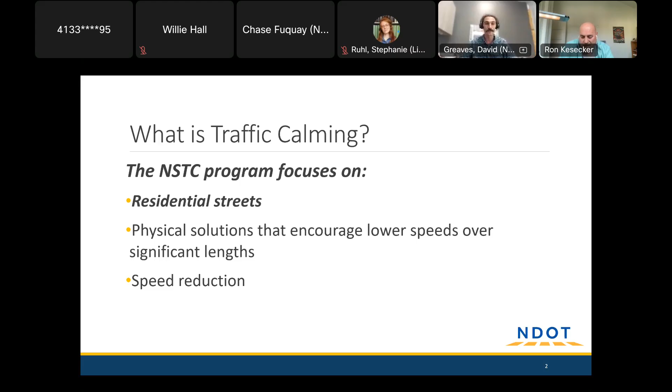One of the reasons speed and speed reduction is so important here is because it has a direct impact on safety. Vision Zero in Nashville is the idea that nobody should have to be killed or seriously injured on our public streets. So the traffic calming program fits into that by making our neighborhoods more safe, sort of in parallel to other programs in the department that focus on different street types.

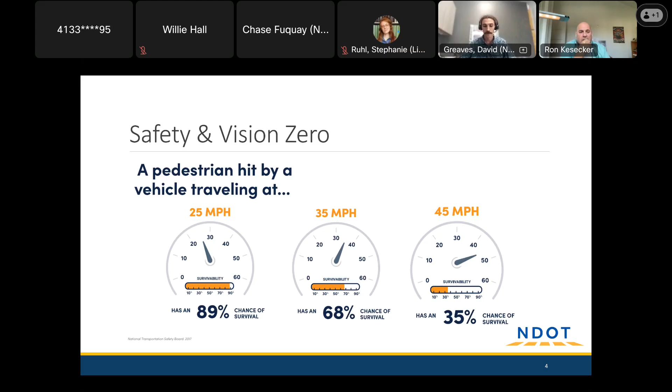This is a really popular program. In March of 2025, when Cumberland was selected for traffic calming, y'all were among a group of about 600 streets or so that have applied and not yet been selected. You can take a look at all of those on this traffic calming tracker map at TrafficCalming.Nashville.gov. You can see the status of the Cumberland Avenue project, as well as every other street that has applied in Nashville. You'll also notice some dark blue lines - those are projects that have been completed, and I know y'all have a handful of those pretty close by.

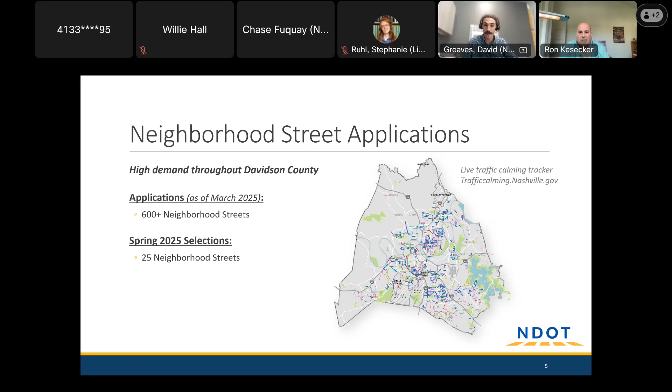Anything we're not able to handle with this project that y'all may still want to see, we encourage you to request through Hub. That can be signals, sidewalks, fixing a pothole, sort of anything on the spectrum of big to small. That can be accessed by calling 311 or going to hub.nashville.gov online, or by using the mobile app. I've found that's the easiest way for me to use Hub, but any of those three work just fine.

This is a map of the extents of the project. We're doing the whole street all the way from Gallatin Pike to the park. We reviewed a draft concept last time. We got a lot of really good feedback from you all about some other treatments you'd like to see, and I'll get into those when we take a look at the design. As you can see, we've got DuPont, Roosevelt, Duling Avenue, all existing traffic calming projects, so I imagine you're somewhat familiar with the tools we're proposing tonight.

Any questions about what I've covered so far before we jump into the proposed design? I appreciate that was a pretty quick run through the recap, but I think everyone here was in our first meeting, so I don't want to take up more time than we need to.

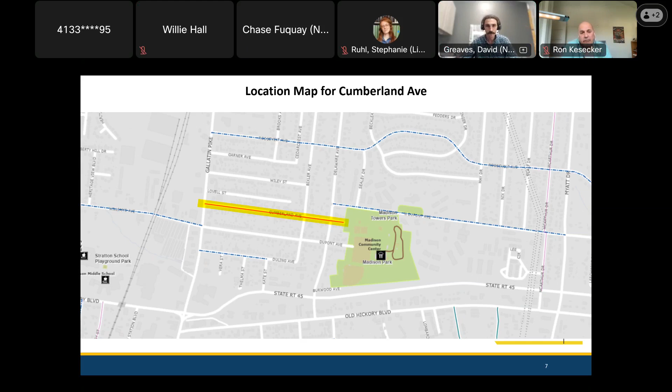So some of the tools we identified for Cumberland Avenue in our concept design, and then based on feedback we got in the first meeting, are speed cushions. To recap, they're similar to speed bumps, but stretched out to achieve a higher target speed. We're not asking folks to go 5-10 miles an hour over these, we're really shooting for the speed limit or just a little bit under.

These have a width of 6 feet and come with gaps in between them. That's intentional, and the idea is that larger emergency vehicles should be less impacted than smaller personal ones. So these are a middle ground between calming the vast majority of traffic without seriously inhibiting the ability for emergency response to do their job.

They're made out of modular rubber pieces, so while they look like one big lump in the road, it's actually a bunch of smaller pieces, individually bolted onto the asphalt. That helps us keep these very consistent over the entire county, and hopefully for a quicker installation time as well.

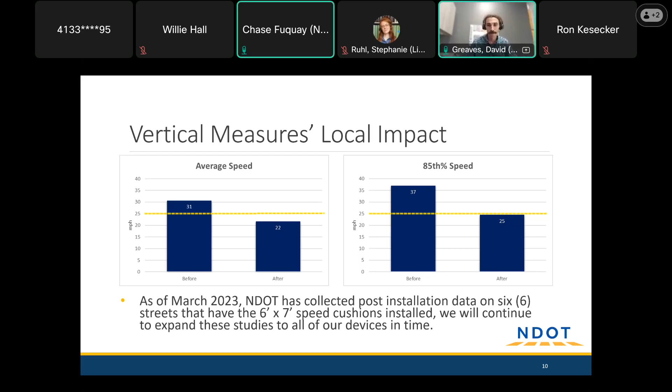The reason we rely on these so heavily is because we know they work in achieving the program's goals. That's demonstrated by a limited study we did back in 2023, where we took before and after measurements on 6 different projects around Nashville, and saw the average speed come down from 31 miles an hour to 22, and the 85th percentile speed came down from 37 to 25. For anyone who doesn't remember from the first meeting, the 85th percentile speed is the number where 15% of people measured were going faster than that, and 85% were going slower.

Something we did not propose in the last meeting, but we heard that y'all were interested in seeing on Cumberland, is edge line narrowing. That was something we left and told you we needed to look into, to see how narrow would be appropriate in this case. What we're going to propose is two 9-foot travel lanes, so they'll feel pretty tight, but that allows for a couple feet on the edge of the roadway. We're hoping that makes it more comfortable to walk on the pavement, since we know y'all don't have sidewalks, and we want people to be able to walk to the park or to Gallatin to catch a bus without being too nervous about conflicting with vehicles.

So we'll take a look at exactly where that is on the plans, but I'm happy to let y'all know that we were able to get this included in the design as well.

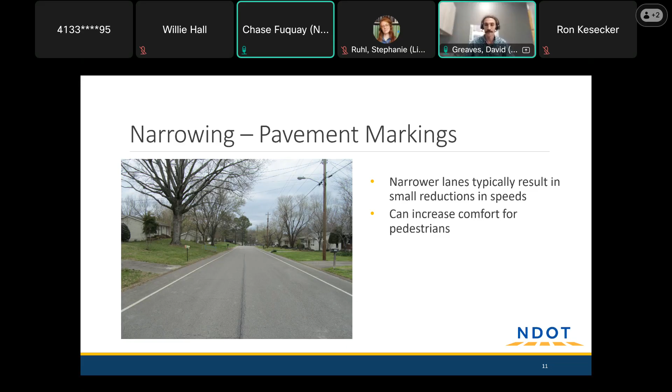And now we can take a look at the plans. Very similar to the concept design we presented, we've got 4 cushion locations identified. You'll probably notice there's a larger space near Bixler Avenue. That's partially due to Bixler being a 4-way stop, so we've got people stopping there anyway. But there's also a bit of a hill just to the west, and we're not able to do cushions on parts of the roadway that are too steep. So we did our best to get those as evenly spaced as possible, but it didn't work out perfectly.

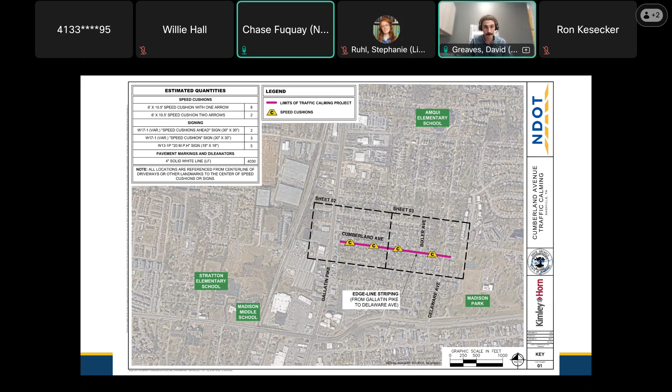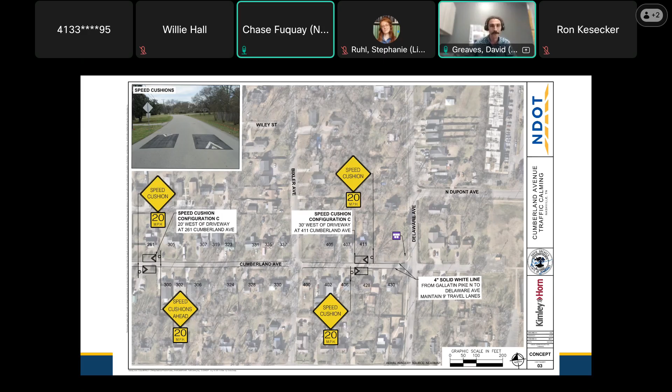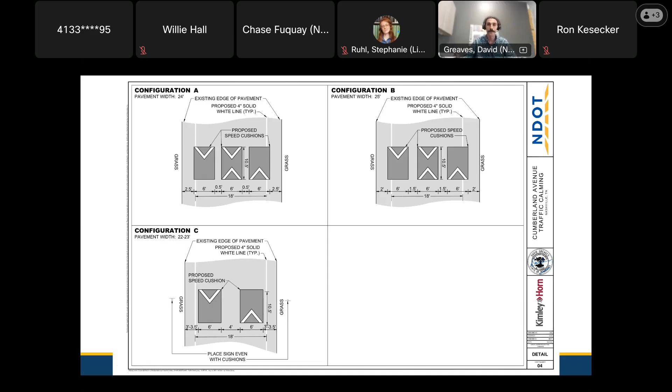And then the last page is just the diagrams that show how those different cushion configurations lay out. You can see we've squeezed a little bit to get 3 in when it's 24 and 25 feet wide, and then stretched them out as that roadway narrows. What we don't want is anyone driving off the road to go around these. So when we've done those 2 cushion configurations, we've made a note that the signs should be placed pretty much even with the cushions, and we found that does a good job of discouraging folks from attempting to drive off the road.

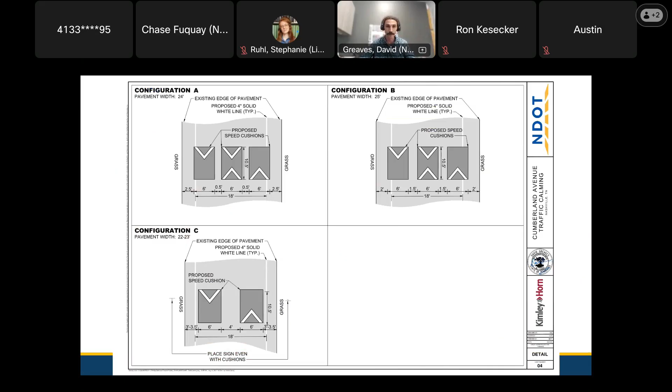Those are the plans. Next, we're going to talk about the rest of the project's process, but before we do that, I want to pause and see if there's anything about these that y'all have questions about, or additional feedback, other thoughts.

Yeah, I'm curious - where do the white lines end and start? Like around what street number or house number? So on the eastern end, it's all the way to Delaware Avenue, and on the western end, it's to Gallatin Pike. They don't continue through the intersections - that's just standard roadway marking. Those are the extents. The only part of Cumberland that doesn't have them is the portion that stubs into the park east of Delaware Avenue. Okay, thank you. Sure thing.

And where the cushions are going in, are you guys putting up those little white bumper things so they can't drive around them? Yeah, so we are not proposing any of those. We have three different configurations of cushions throughout the project. The first two have three across and only leave about 2.5 feet of space on the edges, and generally we haven't found it necessary to put the white delineators in. We'll do those sometimes if the road is of a width that it's not super easy to prevent that. But we think that with using three cushions, or by placing signs next to the cushions, that goal will be accomplished without the use of delineators.

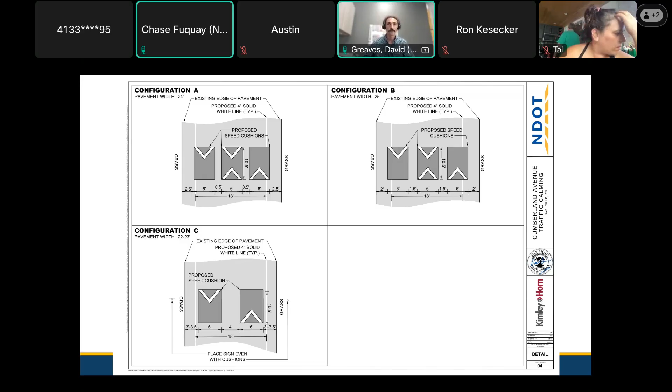Okay, go ahead Ron. Yeah, back to the map - it looks like coming down the hill, the first cushion is at 300 Cumberland. Is that right? Somewhere around there. Yes. So that means from the top of the hill to that first cushion is probably about 150 yards. Is that about right?

That sounds about right. It looks like it's around 500 feet based on the scale here. Is there a reason why the first cushion coming down the hill is so far down versus being at like 324 or right around there where the cars are accelerating on the downhill?

Yes. So the constraints we work around when looking for places to put cushions are the grade of the road - anything beyond 5 to 6% is too steep for a cushion like this to be recommended. The second constraint doing more of the work here is we need to maintain a 15-foot clearance from driveways. So when we visit the site, we keep those things in mind and look for what winds up being a fairly limited number of options on where cushions will work and meet all of those criteria. This cushion on the left is as close to Bixler Avenue as we could get without violating one of those criteria.

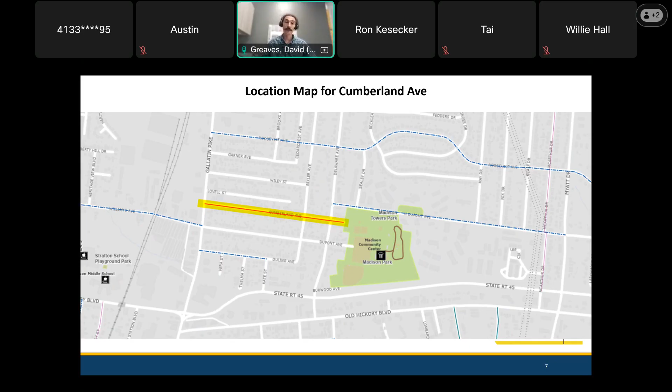Yeah, you were definitely not alone in sharing that feedback, and we're looking into both measuring the degree to which that happens, as well as brainstorming some ideas on how we might address it proactively. Thank you for sharing, because it's all valuable information as we design this project, but then also think about the program in general.

I assume the 5 to 6 degree rule of thumb, not putting cushions on slopes of 5 to 6 degrees, does that have to do with rain or anything like that? I don't know if it's rain necessarily. The warranty on the cushions themselves, I think they've expressed that it has to do with the fact that they're bolted onto the pavement. So when a car strikes a cushion on a flat surface, all the force is essentially going down, but if it's tilted, some of that goes sideways, and the bolts aren't able to hold them down in quite the same way if it's getting pushed down the hill, as opposed to getting pushed into the ground. So in one sense it's because of the manufacturer, although there's also that same guidance when you look at cushions and humps made out of asphalt. I have a feeling that has more to do with making sure vehicles can keep control.

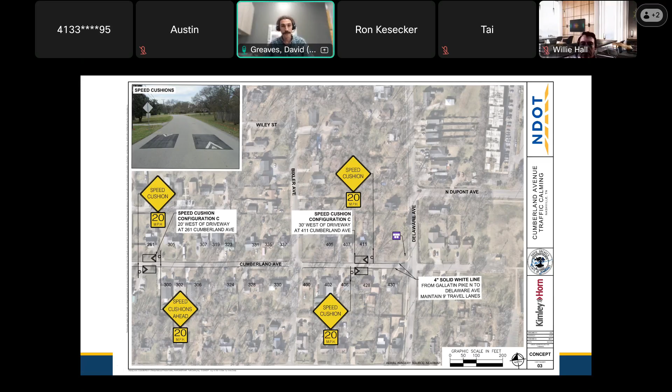Are we ready to kind of move on to next steps in the project? Yes, all right, and we can come back to whatever we need to at the end if need be.

So to recap how a general traffic calming project works, we started with an application, did that prioritization and selection process. We've had neighborhood meeting one, which was around a month, maybe two months ago. As Ron noticed, we have done our field review, so we did a site visit and took measurements, really found specific locations where cushions work, and refined our concept design based on feedback we got in our first meeting. And then now we are here, at the red circle.

So as you can see, there are only two steps left. We need to do the online ballot—we'll talk about how that works specifically in just a minute—and then should it be successful, that being 66% of people voting favorably, it'll move into the construction queue.

It probably will be a little while between approving the project and it getting done, just due to the high volume of other traffic calming projects that we're excited to put in. But once it passes the ballot, it is destined to be built, even if it takes somewhere between 8 and 10 months.

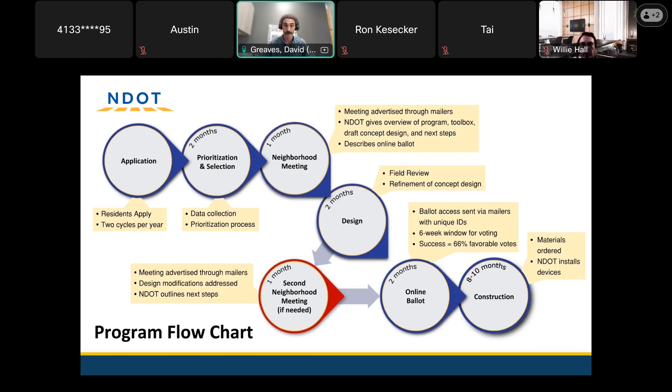A little bit about the ballot. We're going to send out mailers that are very similar looking to the ones that invited you all to this meeting, so be on the lookout for those.

They display instructions on how to fill out the online form, as well as a QR code, and we say how long or when the voting closes. We shoot for roughly 6 weeks, usually erring on the higher side, just to make sure anyone is able to receive this postcard in plenty of time to review the plans, talk with their friends and neighbors, and get online and vote. But we put the deadline on there just to make sure nobody misses it.

Also on that mailer is a unique ID. On the form it'll ask for that. We basically use that to make sure no one's voting twice or sending it to all their friends and having them vote too. It's just a way to keep the tallying secure.

As already covered, 66% of respondents voting yes is successful. So it's not every property - it's like a regular election where your vote counts if you vote, not if you don't say anything. That's neither a yes or a no.

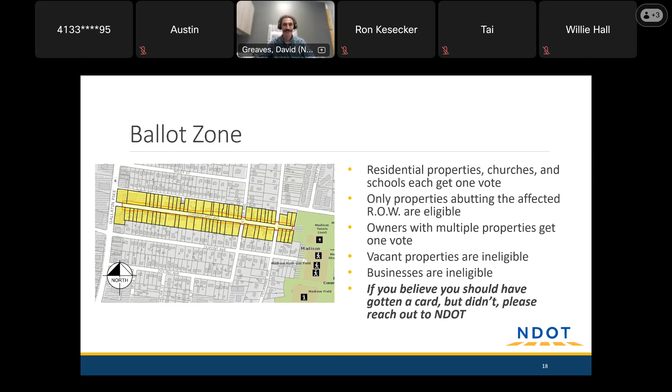There's a Metro employee here in our house, and I knew you guys would do a great job because Metro does a great job. So thanks, really appreciate that. Any other questions? I just want to second that you're doing a really great job with all of our concerns. I really appreciate you, thank you so much.

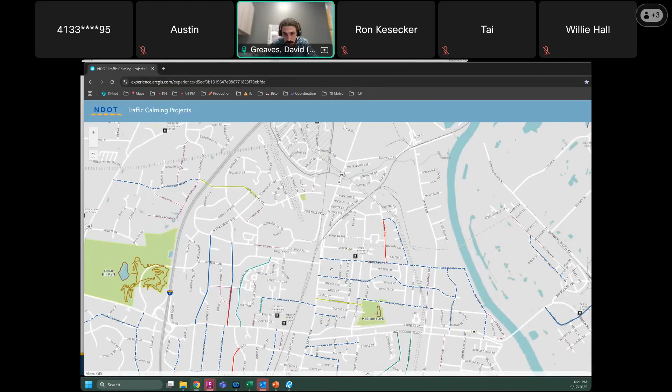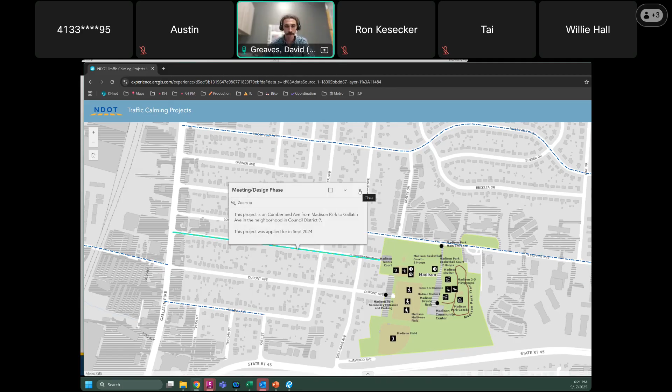Yeah, let me drag this down onto the screen. Okay, it's working, so this is the live traffic calming tracker. What I've got here is Ben Allen Road, and it's yellow because the ballot is currently open. So when we send out the ballots for Cumberland, which is somewhere up here, yeah, here we go, this will go from green to yellow. Right now we're in the meeting and design phase, and once we send those mailers out it should turn to yellow. Probably not the same day, but definitely well within the 6-week window that it's open. Okay, great, that's what I was asking, however poorly. Thank you. Sure thing.

All right, everyone, thank you so much for your time this evening. Really appreciate the additional feedback we got. I've got a couple things to look into, but once we've finalized those plans, we'll get with NDOT, have them posted on the website, and then send the ballots out so that when they hit your mailboxes you'll be able to jump online and take a look at what we came up with.